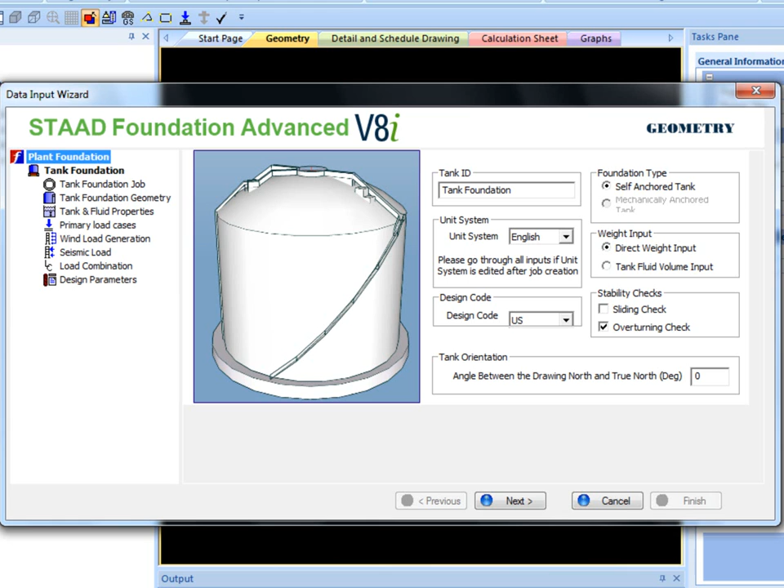The first window, called Tank Foundation, is only to specify basic information pertaining to the tank foundation job. A tank ID or title is required. The ID allows for differentiation between multiple tank foundation jobs in the same file. Unit system and design code can be changed with these options.

The user can also choose to do sliding or overturning checks and specify the angle in degrees between drawing north and true north. Weight input provides two options for the program to calculate the fluid's weight in the tank. Both options change inputs in the primary load cases section.

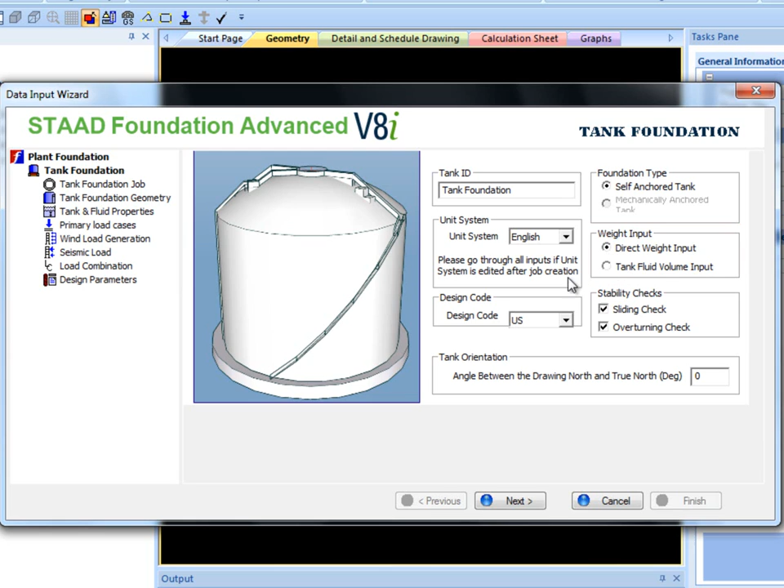The first, direct weight input, allows the user to input operating and test fluid weight and height for the program to calculate appropriate weight values. The second, tank fluid volume input, gives fluid properties like operating product volume, test product volume, and specific gravity of the product to calculate weight.

Tank geometry provides inputs for the geometry of the tank foundation. Bottom of footing elevation will be used for the detailed drawing only to show elevations of different levels. A width increment value may be changed, which will be used to increase the width if necessary. The depth increment may not be changed.

Ring wall geometry options like eccentricity from tank diameter to footing centerline, width, and height options can be inputted. Width has a minimum and maximum option to allow the program to calculate the most efficient design within a specified region. Also, concrete slab thickness, compact granular fill, and miscellaneous weight for attachments options are available. The diagram shown here gives reference to the tank foundation geometry values.

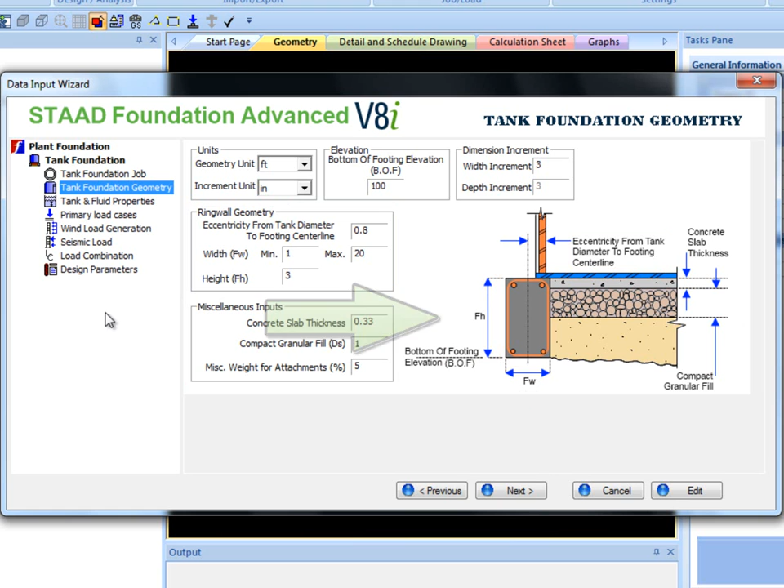Tank and fluid properties provides tank geometry, thickness, and material property inputs. The tank pictured here provides reference to tank geometry and thickness inputs. The tank material properties are yield strength of bottom plate, elastic modulus of tank shell, and tank material density. These inputs are used to calculate the empty weight of the tank.

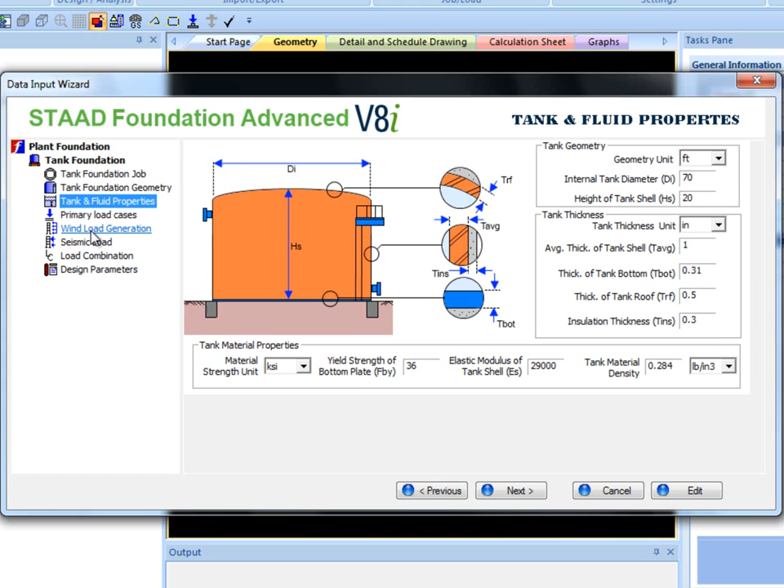Most of the loading section was explained earlier when selecting between direct weight input and tank fluid volume input. This applies to all sections, but it's important to make sure that all of the units are specified correctly. Keep in mind that two pressure unit inputs are given, one for internal pressure and one for pressure load. Operating and test level internal pressure must be inputted. Potential pressure loads include roof snow load, miscellaneous dead load, and live load. A snow importance factor is also provided.

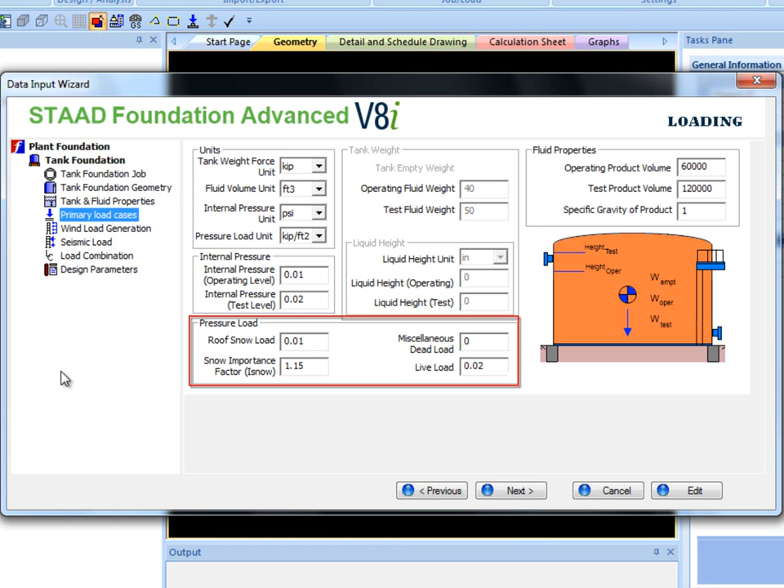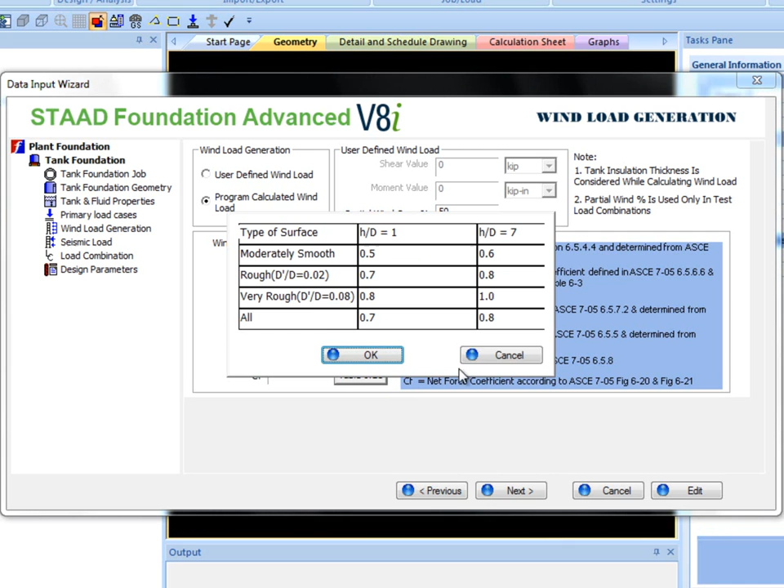In wind load generation, the user has the option between user-defined wind load and calculated wind load. The program calculated wind load option will calculate the shear and moment value based on the given input values. A few of the values are taken from tables in ASCE 7-05, which are shown if you click on the buttons. Tables 6.6, 6.1, and 6.21 are provided to determine KD, I, and CF, respectively. A description of each of the inputs is given in the blue box. If the shear and moment values are already known, selecting user-defined wind load will allow for their direct input.

STAAD Foundation Advanced requires the convective seismic loads and impulsive seismic forces for both operating and test shear and moment for tank design. These values are inputted or calculated in the seismic load generation section. If they are known, select Direct Seismic Load Input to enter the values. If not, other parameters become available which will generate these values for you.

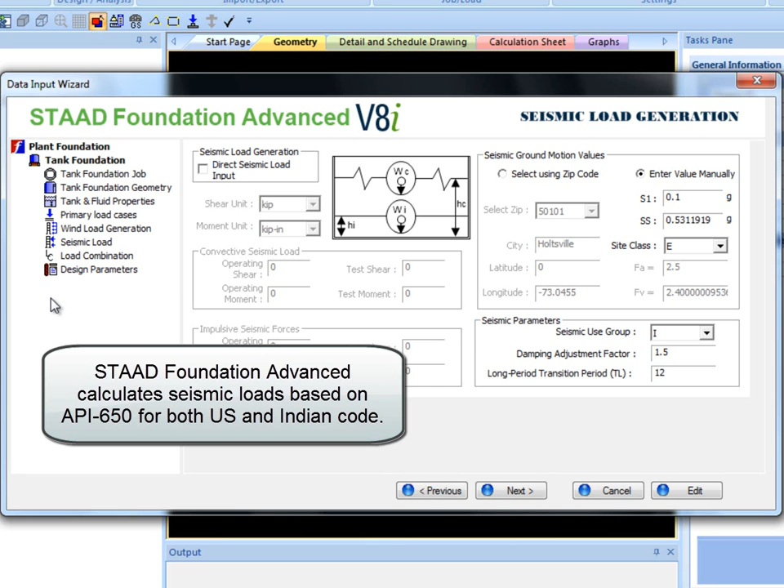Also, the user can choose to enter seismic ground motion values manually or select using zip code. The seismic parameters, seismic use group, damping adjustment factor, and long period transition period can be adjusted as well. STAAD Foundation Advanced calculates seismic loads based on API 650 for both US and Indian code.

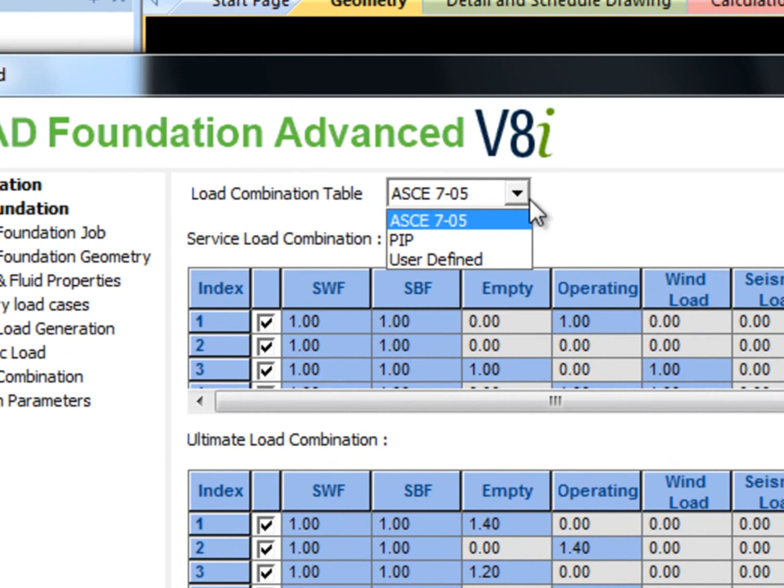In the load combination section, service and ultimate load combination tables are shown similar to the load combination tables in the general mode under loads and factors. Here the user can choose to use either ASCE 7-05, PIP, or user-defined to enter his or her own load combination values. If ASCE 7-05 or PIP design code is selected, the values in the table can still be edited.

The design parameters are split into soil properties, material densities, safety ratios, and concrete and reinforcement. Soil properties include allowable soil bearing pressure and the coefficient of friction. The safety ratios include sliding safety ratio, soil bearing multiplication factor, lateral earth pressure coefficient, and overturning safety ratio. Concrete and reinforcement contains basic related information. Stirrup and bar sizes will be designed most efficiently between the user specified minimum and maximum values.

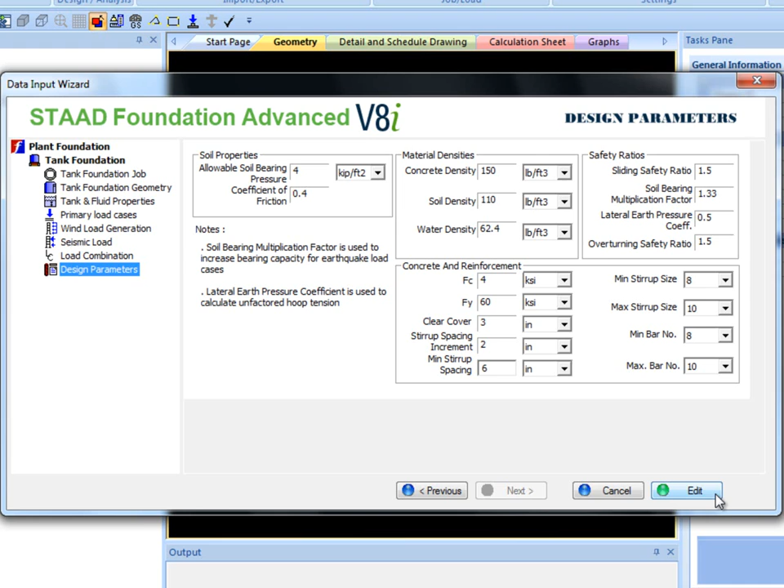After all of the steps have been completed, click Finish. This example says Edit because I switched to an existing example file to show standard values. The tank and foundation can now be viewed in the geometry view. This is a graphical representation of the user's input with a typical tank. From this point, you can either edit, which takes you back to the tank creation wizard to edit any section, or you can delete or design. You can also input any number of plant foundations in the same file.

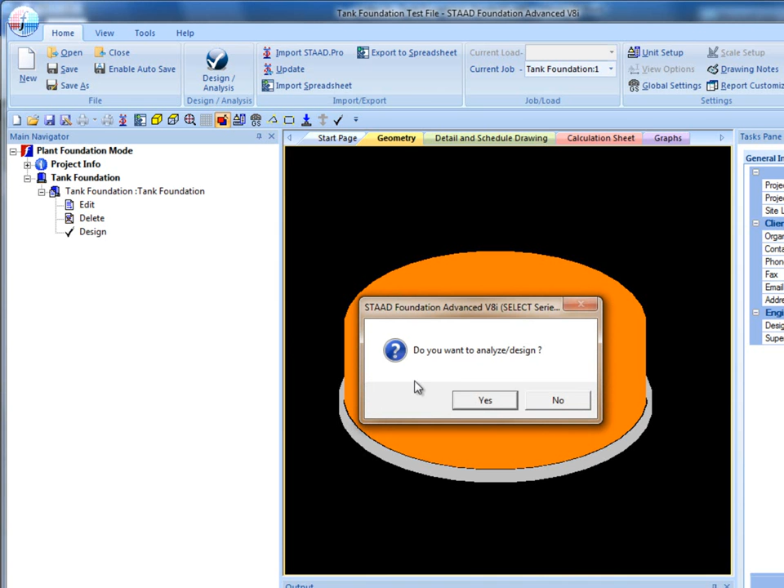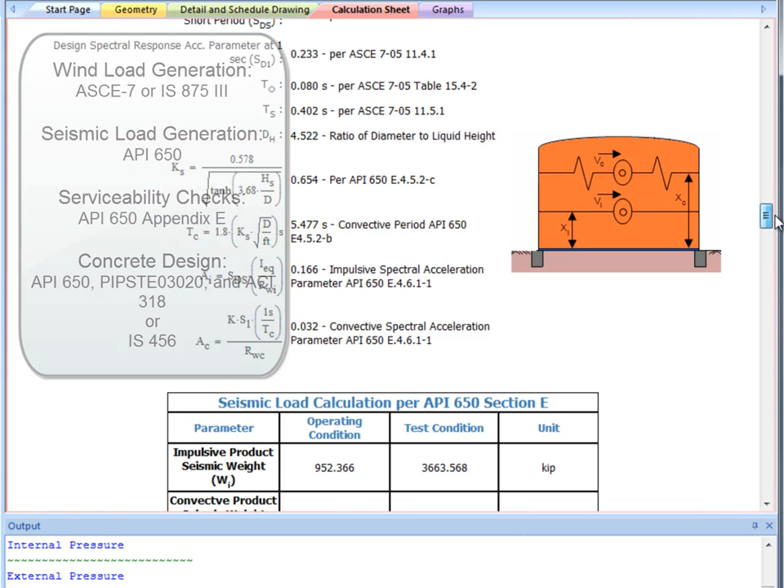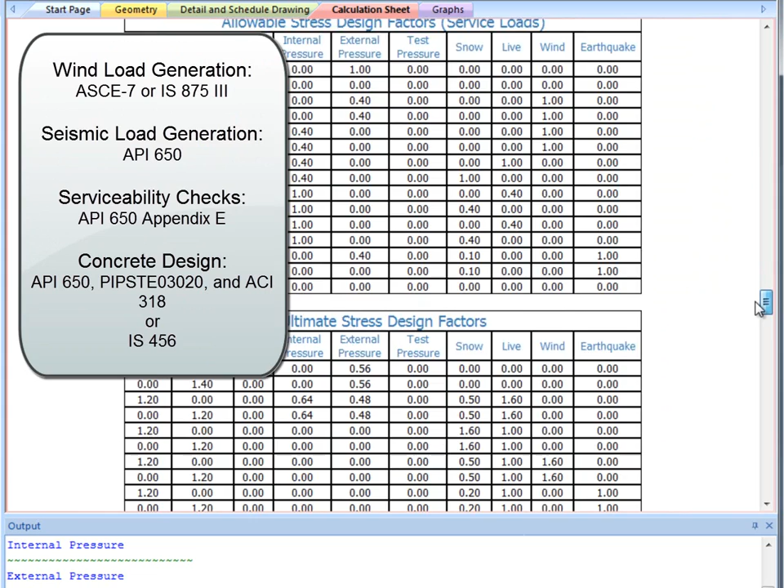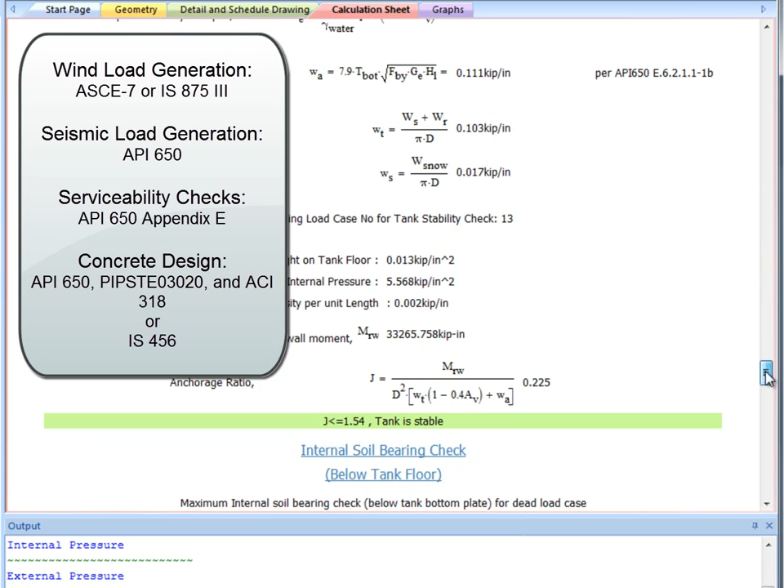Designing creates a calculation sheet and detailed drawing. Calculation sheet specifies how each footing was designed. It includes detailed steps, figures, and references to the code which was used for design. STAAD Foundation Advanced uses ASCE 7 or IS 875 Part 3 for wind load generation, API 650 for seismic load generation, API 650 Appendix E for serviceability checks, API 650 PIP STE 03020, and ACI 318 or IS 456 for concrete design. Let's take a closer look at the tank stability design calculations in the calculation sheet.

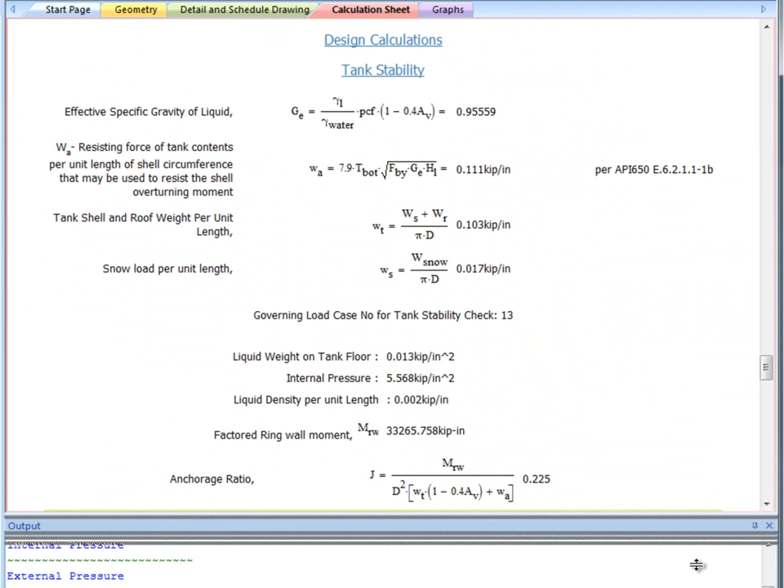Here, design steps are shown, including the required equations and user inputs. Detailed drawing gives plan, elevation, and section views of the footings. This drawing shows tank dimensions and any reinforcement.